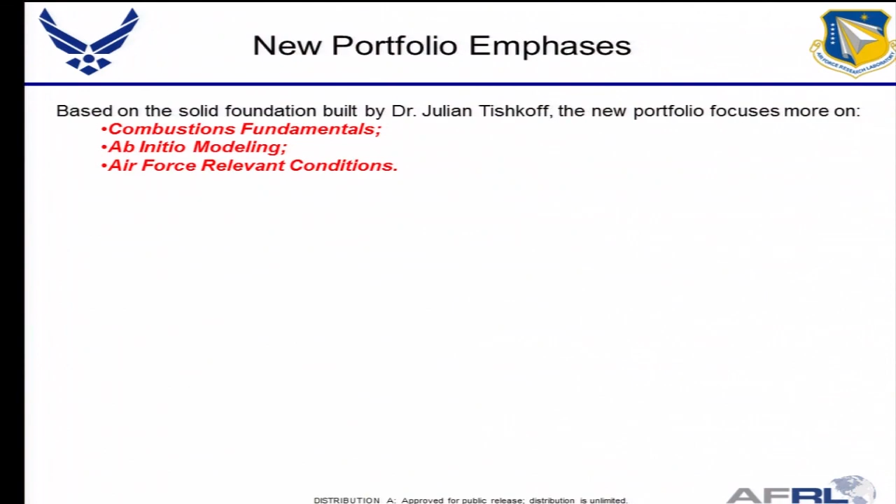But here are more the attributes of the portfolio: we go far more fundamental into turbulence flame structures, turbulence flame speed, and other properties. In the modeling area, we'll go far more first-principle based. If we cannot do first principle, we'll base our model on experiment data rather than uncorrelated assumptions.

We will focus on Air Force relevant conditions, and that does not mean I try to focus each propulsion engine type to make it apply. That's happen to be where the most interesting phenomena happen, where we will understand things.

And the sub-area, as I talked about, diagnostics and experiments: we try to focus on the region at high compressible, high Reynolds number conditions, which happen to be relevant to Air Force systems, which happen to be understudied before. I will have a chart to show you on that.

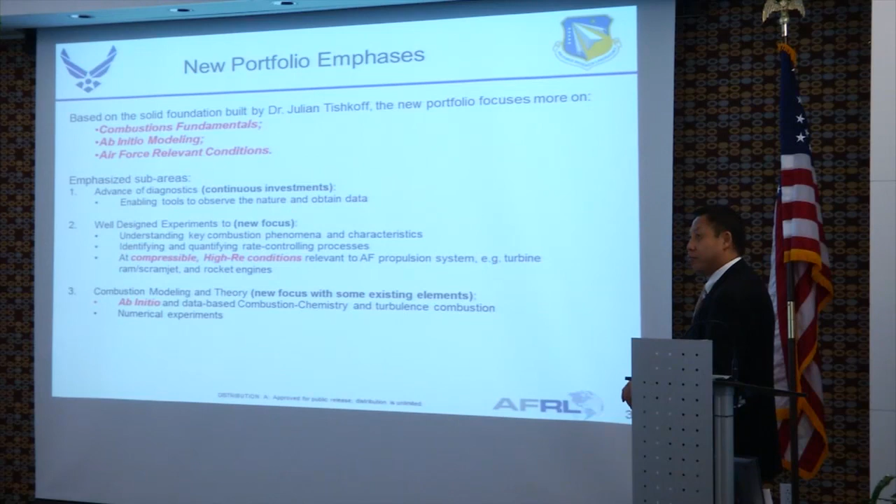And in modeling and theory, we'll focus on the first-principle-based model and the experiment-data-based turbulence model. We'll focus on numerical experiments. We'll use numerical experiments as a tool to allow us to explore nature and explore phenomena. So that's why we try to use it.

And the portfolio already has an element using it. We'll probably expand that - we found it's a successful way to supplement the physical experiment. And lastly, we'll explore different types of combustion regimes in areas we haven't explored before. And in the case where we have too many rate controlling processes, we can really make sense of handling it - we can inject and impose a rate controlling process to make the phenomenon behave the way we like. So those are the lines of exploration we're going to take.

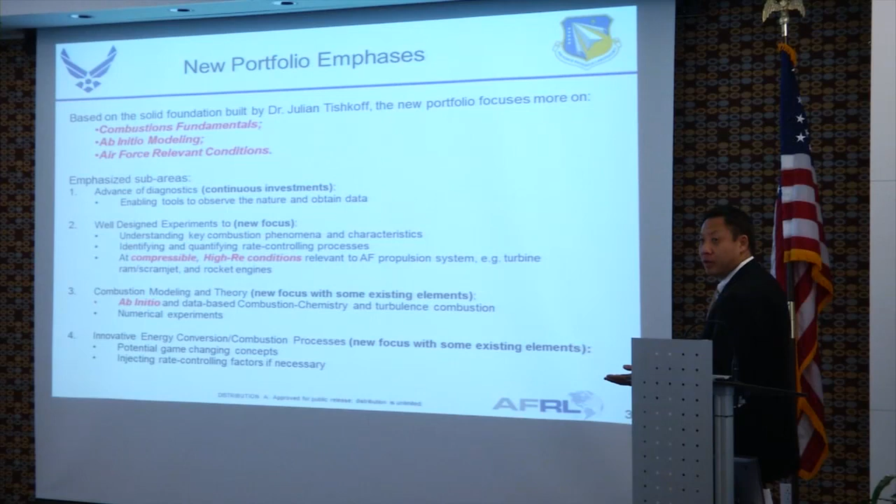Let's go into the next page. What is the key combustion phenomenon? I'm relatively fortunate because in this area there is a key phenomenon that has been recognized for hundreds of years, which is called turbulence combustion or turbulence flame. But in the area we're interested at, it's really underexplored.

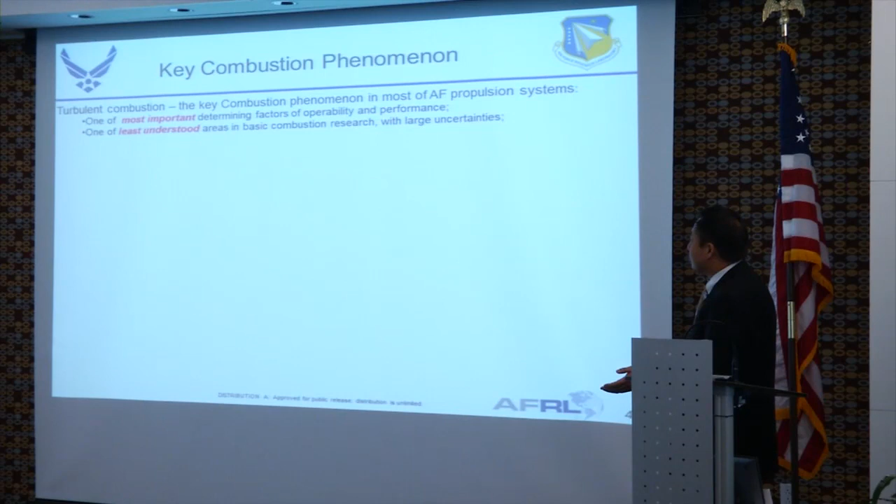So that's the focus: turbulence combustion, which is a key combustion phenomenon in most Air Force propulsion systems. It is the most important determining factor for operability and performance. It is the least understood area in basic combustion research, with rather large uncertainties which prevent us from predicting it properly.

This next topic is a confluence of a grand old fundamental scientific problem that also has immediate and long-term impact. The basic data we're getting will allow us to understand flame structure and flame properties, and some of it can be directly used for the design of next generation engines.

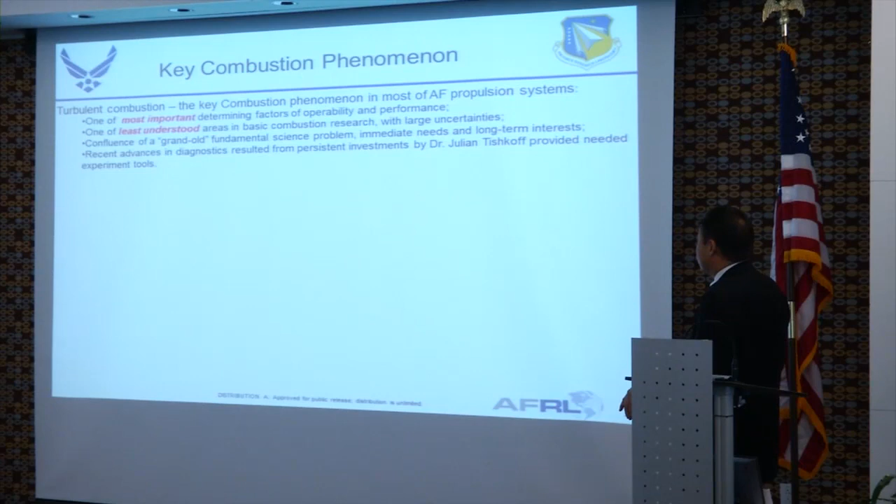It's a perfect confluence. The next factor is the recent advance in diagnostics, from persistent investment by Dr. Tishkoff, which provided the needed experimental tools. That's further substantiation.

That's some typical engines - I think that's the only chart I took from my predecessor's charts. All three of these engines have some kind of combustor, and they all have some flame. Those flame structures, and the way they propagate, determine how well the engine performs, how big the combustor is, how heavy it is - all those things.

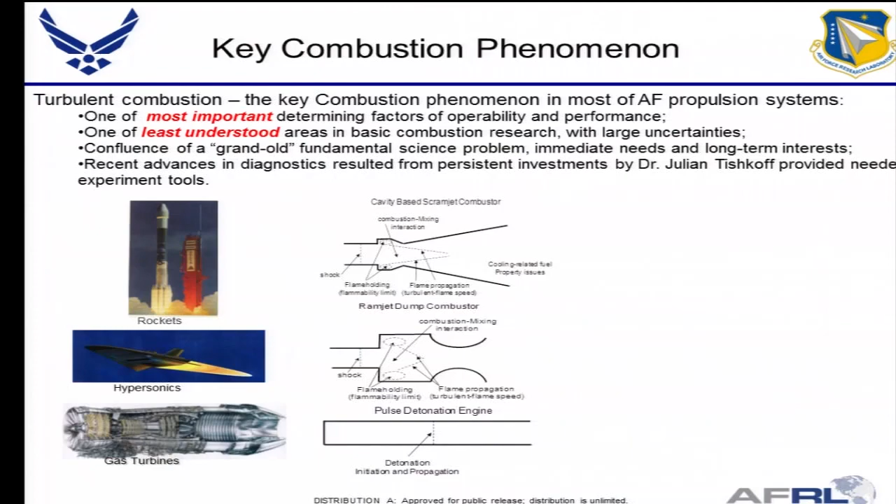Do we understand them? That's the problem - you will see, and draw your own conclusions. Typically people understood the first one, called the Laminar Flame. It's a nice looking propagating flame, well studied with many publications, and people use it to understand things.

But in our engines, we have a flame like this, because that flame propagates too slow, and has a really curved shape. We don't know what the shape is, and very few experiments have been done.

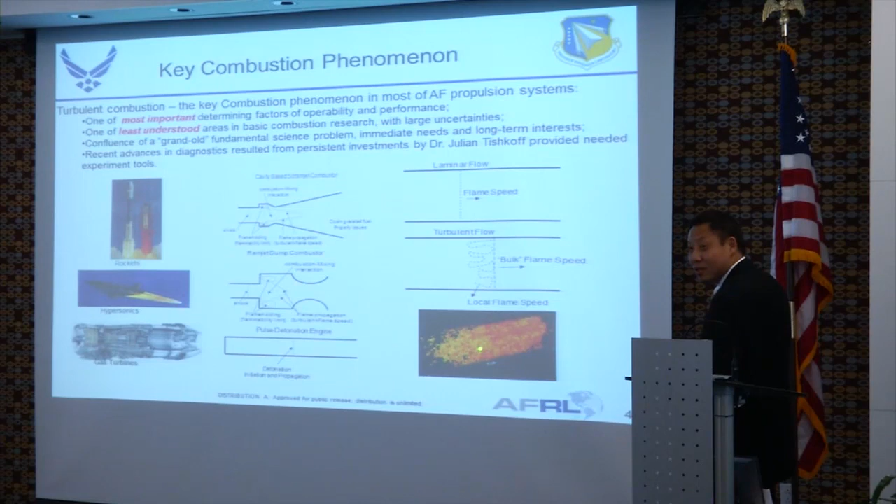In those high Reynolds number conditions, if we push the Reynolds number even higher, what do we see? This is the flame we see. So that's the critical phenomenon we're going to attack.

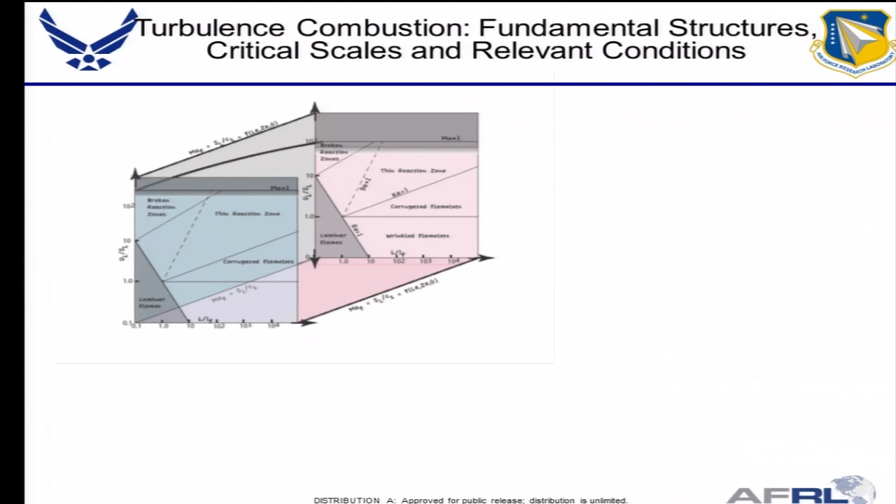You can have Mach number on one axis, and another axis representing the chemical reaction, which we usually call the Damkohler number - it's a ratio of the chemical reaction time versus the residence time of the fluid. We can also have a Reynolds number axis, some kind of equivalent Reynolds number. You can draw it in many ways to basically show the impact of the different critical scales.

This is the pretty diffusion flame region. People have been studying this for many, many years. Some of the PIs still study it in the previous portfolio, trying to evaluate different chemistry processes for different fuels. Where do they sit? Right here.

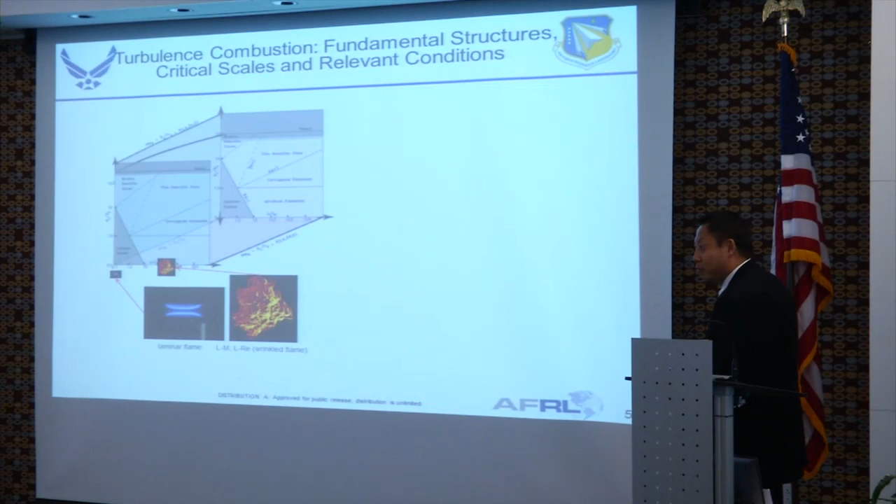This is a little flame ball generated from a bomb, which is typically equivalent to the conditions of an auto engine - the mixture burns in the piston, even a bit slower than that. Where do they sit? Right here.

Next one gets prettier - this one you've seen. This is the flame at high Reynolds number, high Mach number conditions on its way to detonation. I have a movie later showing this. Where do they sit? Right here.

This is the auto engine. This is our engines - where do our engines sit? Somewhere right here. Do we know? We don't know, but we know it's somewhere in between. It's very turbulent, and somewhat compressible, depending on the type of engine.

If you have a jet engine, it's Mach 0.1. If you have other engines, it becomes higher and higher Mach number. You have PDEs here. I've been talking to TDs at different engine companies, asking: do you guys know these conditions?

They say, oh, we have U prime bar, which is the standard deviation average. I said, that's not enough - do you know the spectrum? They don't know. And we have some guesses. I said, no, we're doing science - we need something better than guesses.

So we don't know exactly where they are, but we know it's from here to here. That's what the previous work, supported in the previous portfolio, already tells us - since we're here, we need to understand somewhere here, step by step. That's really the contribution of the previous work, telling us where to go.

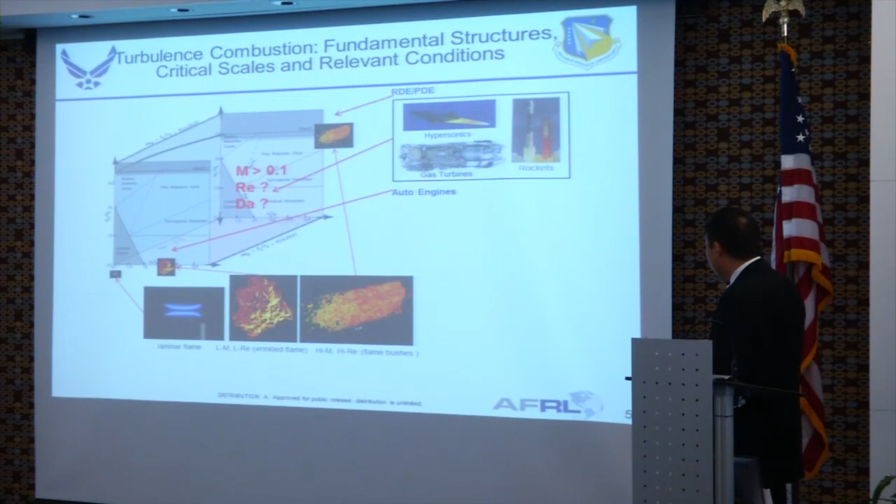There are future things, like detonation-based engines, appearing. So what are the questions, what's the observation? There's little data available in this region. I got lucky - I have some places I can work on, in high Reynolds number, high compressibility conditions.

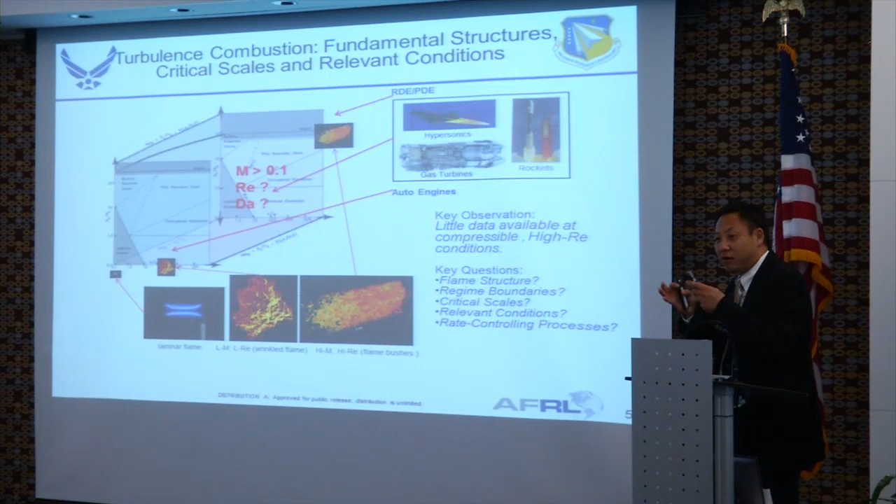Key questions: what do we want to know? The flame properties, flame structures, regime boundaries - where does the flame change its shape, change its characteristics? Critical scales - how important are those scales, and are there any other scales we need to control the flame? What's the rate controlling process - chemistry, heat transfer, all those things? We need to know those things.

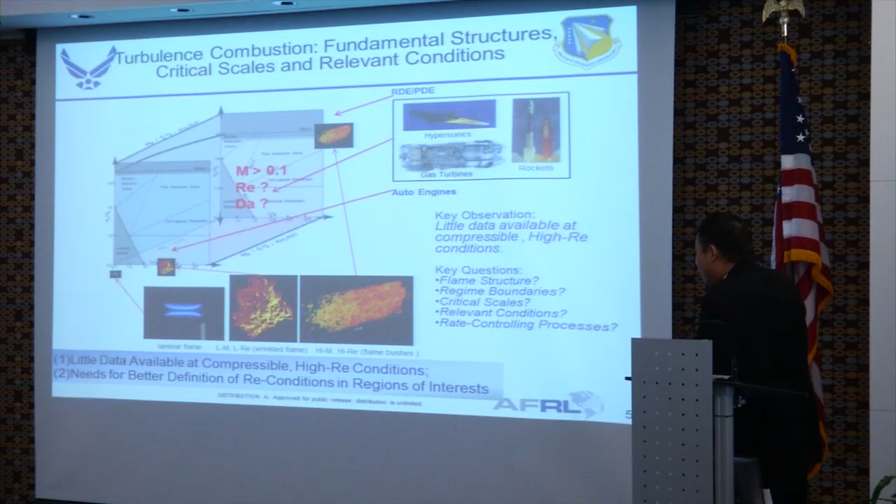So what's the moral, what's the takeaway message? We have very little data now, and we need a better definition of the conditions. We need to go back to understand those things.

And I have my reasoning why that was being done, why so much work was done in that low Reynolds number regime. I wouldn't further speculate on that.

So this is one of the experiments I call the lower bounding case, and it shows how the flame ball was produced. There's further information, a further message to be delivered.

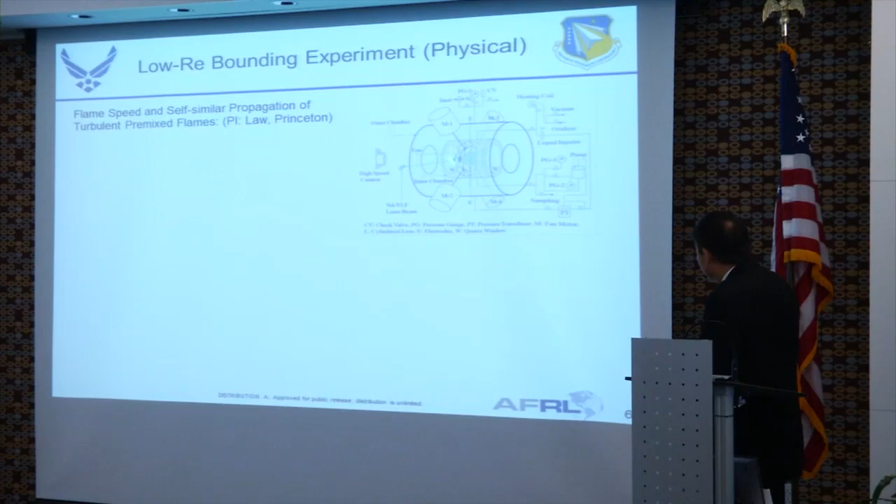What happens is they have an inner chamber. They generate turbulence through those fans, through those motors. Those are the flame ball shapes. Those are the locations of the flame ball, the average location over time. So this flame ball just grows.

The slope of this curve is the turbulent flame speed. You can see at this modest Reynolds number, the speed is already increased. Not only at the beginning, for each Reynolds number, the speed increases through the course. So this is the effect of turbulence.

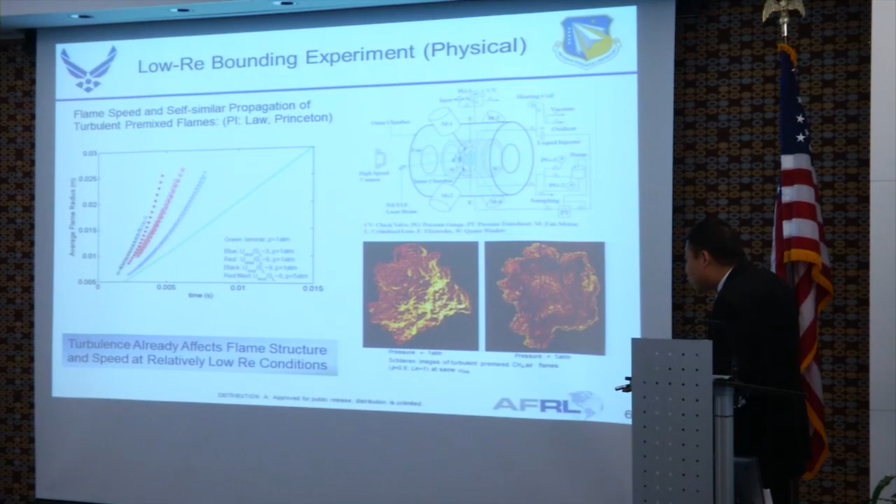And it's already showing a fact which is usually not really well considered, from basic scientific understanding all the way to the design tools. So what does this tell us? Turbulence already affects flame structure and speed at relatively low Reynolds number conditions.

Upper bounding case. This is when I was also existing alongside PIs, and our Navy partners had a great team. And our NRL, supplemented by one of her younger researchers from Ukraine, explored not only this type of detonation flow but all the way to supernova explosions, all those things. They basically applied similar numerical simulation as exploratory tools to do experiments and explore all those things. So really great things came from that team.

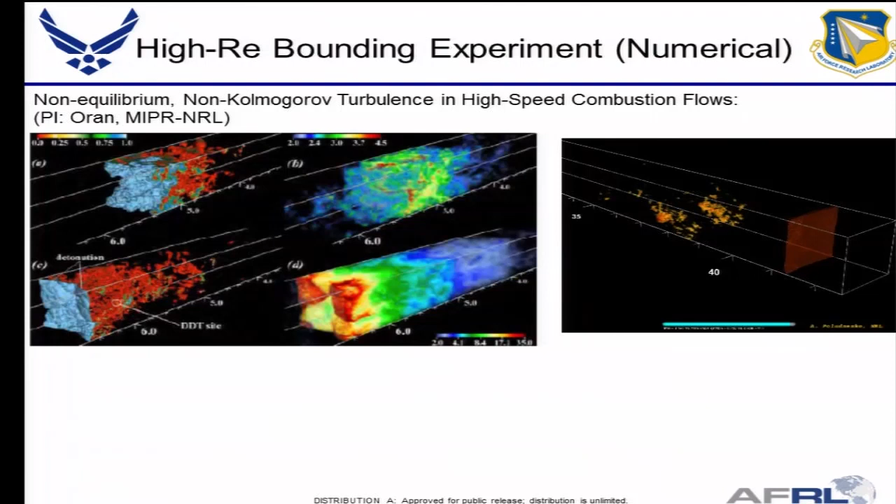Finally, order arises from it. Order arises from it when you see a little surface going to the right, becoming detonation. Then detonation is a very well-defined structure in the combustion.

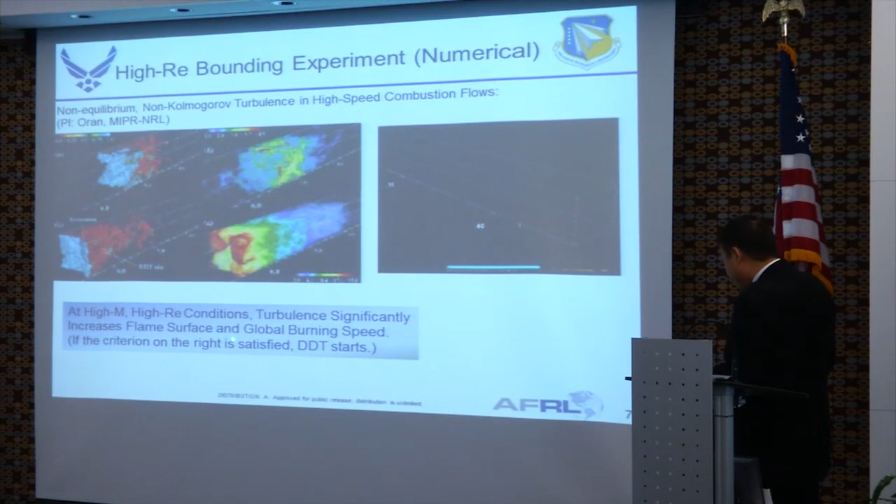And so what happens is, at this very high Reynolds condition, the turbulence significantly increases the flame surface and the global burning speed. If the condition on the right-hand side, which I haven't shown you yet, is satisfied, the DDT starts.

This is another great thing that came from this group. And once people write this down and start explaining it, it's super simple, almost obvious. Why didn't I figure it out? Because I hacked on this problem for 20 years.

I never saw this. What it says is - this is sound speed, this is the ratio of density before and after the flame, and this is turbulence speed. If turbulence speed is greater than this criteria, it goes to DDT.

What happens is, because you rely on sound waves to relieve the energy produced from those reactions from the flame, if the energy is not able to release - if this goes too fast and pressure accumulates - then you're on the way to detonation.

And so they came up with this. They got, I think, a paper in Nature - you see, I'm in the combustion business, we don't usually publish papers in Nature or those things, we have our own journals. This is our advantage - probably one of my PIs won't get a Nobel Prize, but they started publishing these things and being appreciated.

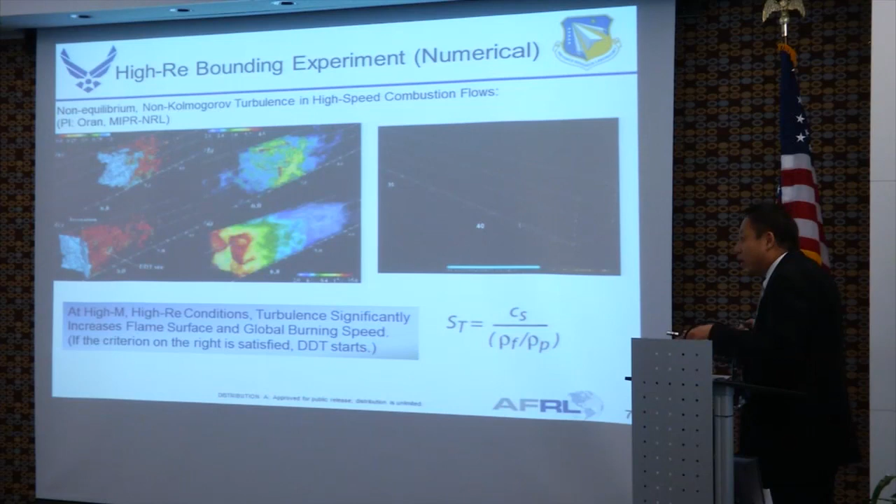So this is one of the really interesting things, really makes me kick myself, because I was doing similar things. And why didn't I think about this? Okay, so let me go into the next chart fairly quickly.

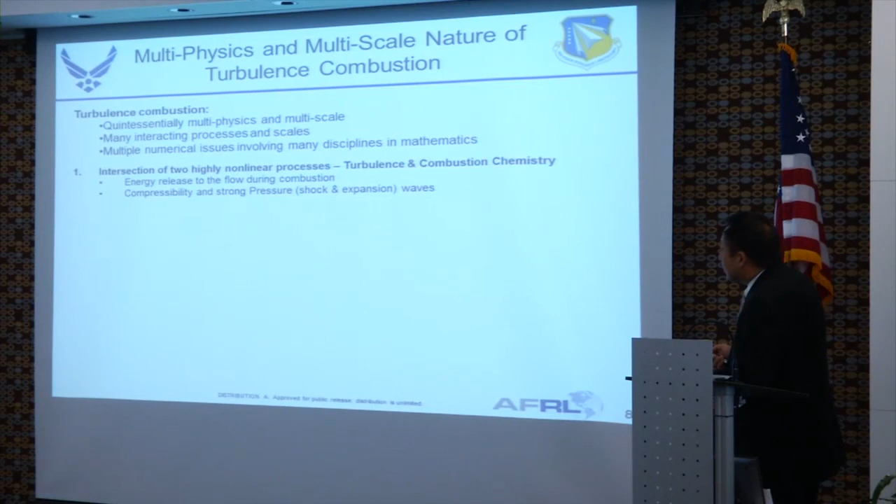I want to get more into the physics. The next two charts basically say we're dealing with multi-physics, multi-scale phenomena. Turbulent combustion is quintessentially multi-physics, multi-scale. And the next thing I want to say is it's the intersection of two highly nonlinear processes.

If you think of John Schmisseur's and Doug Smith's life stuff, he has one nonlinear process. I've got another one - chemical reaction terms, which are exponentially dependent. So that makes my life miserable, I can say.

But I'm an optimist. What I see is you have things that can become orderly, like detonation or something. So in all those chaotic things, something may happen after we study this. We may learn something new.

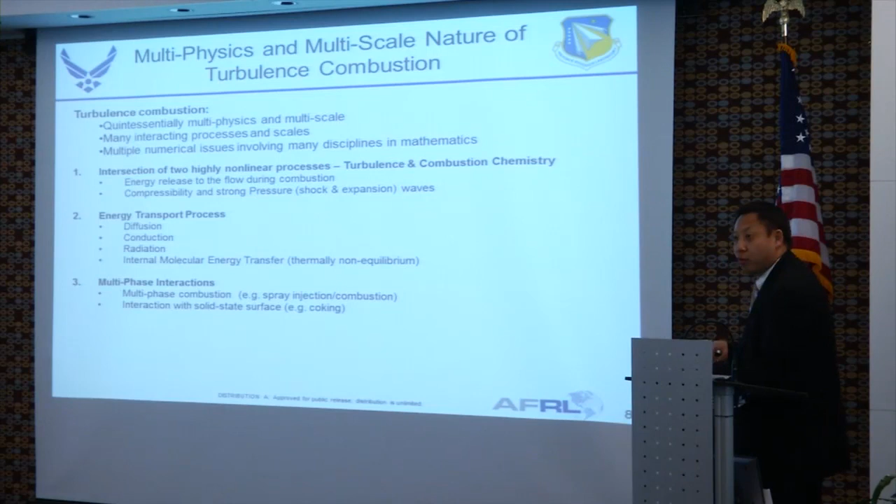And the second one - you have all the energy interactions, diffusion and radiation, all those things. And if we want to consider a real engine, we may have droplets, we may have two-phase combustion, all those things. And we have all the numerical issues we have to deal with.

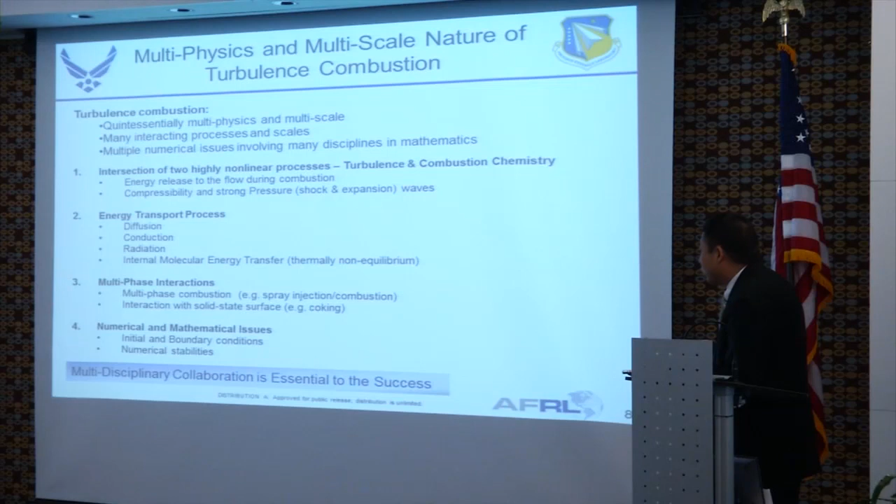So what do we do? We have to do multidisciplinary collaboration - it's essential to success in this area. Next one.

Well, the portfolio has to have some underpinning philosophy. Each program manager has their own way to do it. It's not the only way, but it's one way. As long as it makes sense, we do it.

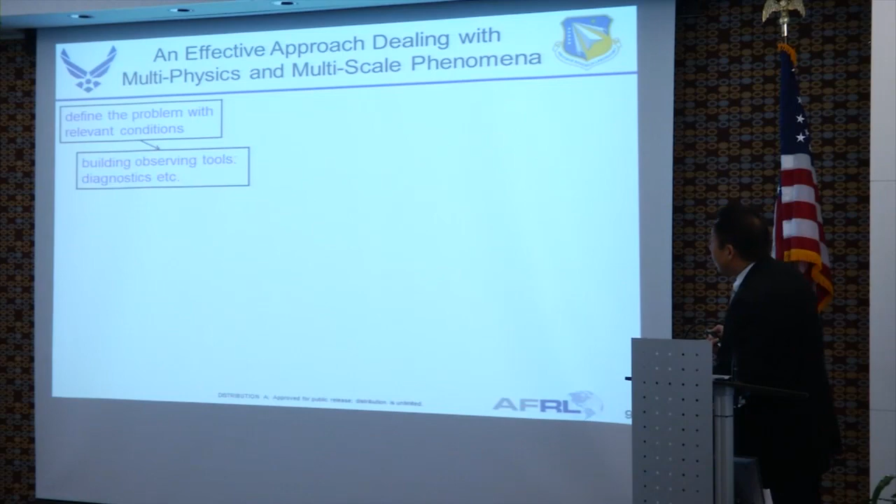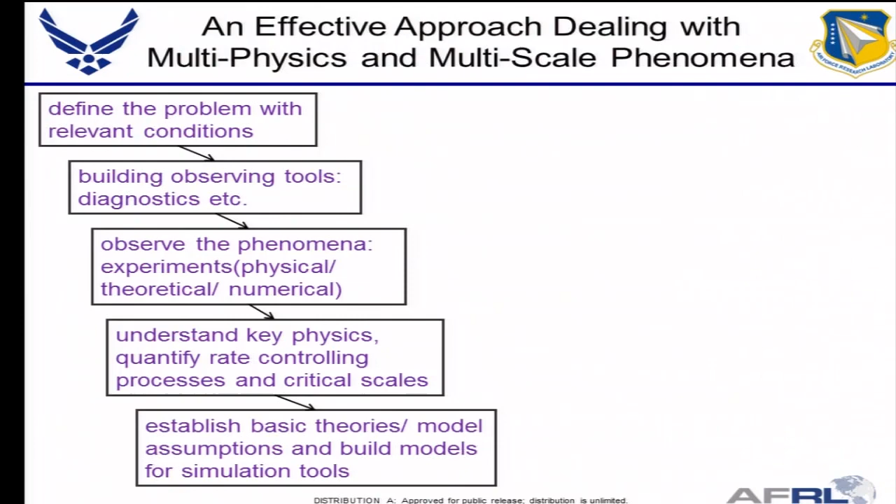What we like to do is try to understand the nature, build our observation tools, get our understanding from experiment or numerical experiment. Then we understand the key physics. We try to quantify the rate controlling process. If we can, we establish a theory which we can use to predict the future.

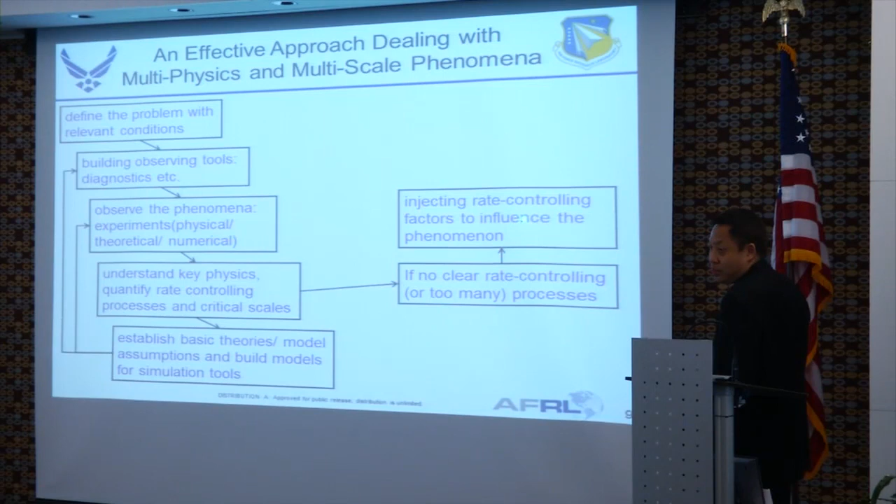And so it goes back. If we cannot, then we are not totally out of luck. We may impose other processes like plasma or catalytic to create a rate controlling process. Then we can manipulate the phenomenon the way we like. And if we understand that, we can do the step.

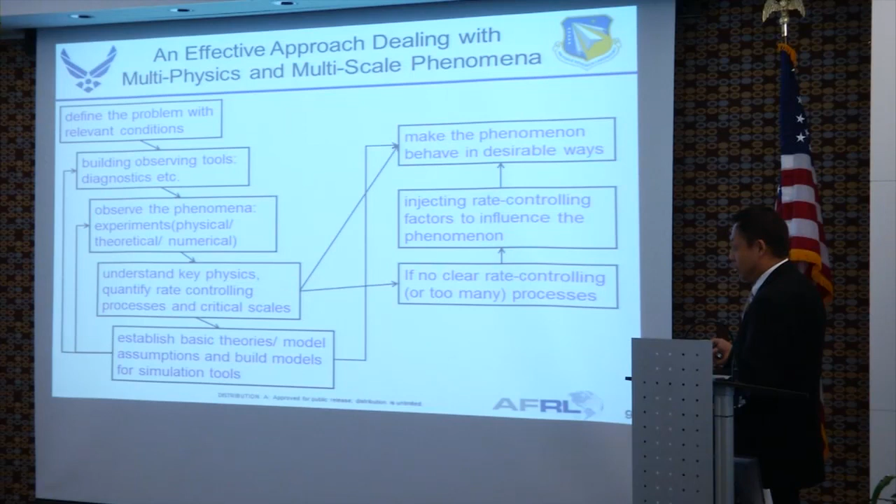So that's the philosophy we're following at this stage, for the next year, maybe 3 or 4 years, depending on what we learn. There's also collaboration with other agencies. To save time, I will stress only 3 points.

One, we already have a pretty strong collaboration. Number 2 is we divide the problem, divide and conquer. For example, in this portfolio, we will now focus on the highly compressible, high Reynolds number conditions, more relevant to Air Force engines.

I will leave laminar flames and low Reynolds number flames more to the auto engines and ground systems, to DOE and NSF. NSF supports everything, and DOE handles that. We've already had talks with key DOE personnel, my counterpart, and people at Sandia.

Sandia has a whole bunch of really excellent experts, and their work is great. So if they can focus on the lower Reynolds number regime and push up, that will help us and help them. We'll work on this area.

Not much work has been done before in this area. We've talked and met at different meetings, but I'm going there in a couple of weeks to further solidify this relationship.

So we divide the problem - different agencies do different things. As John mentioned, there's an unfortunate situation with NASA's effort on hypersonics. I will not drill further on that.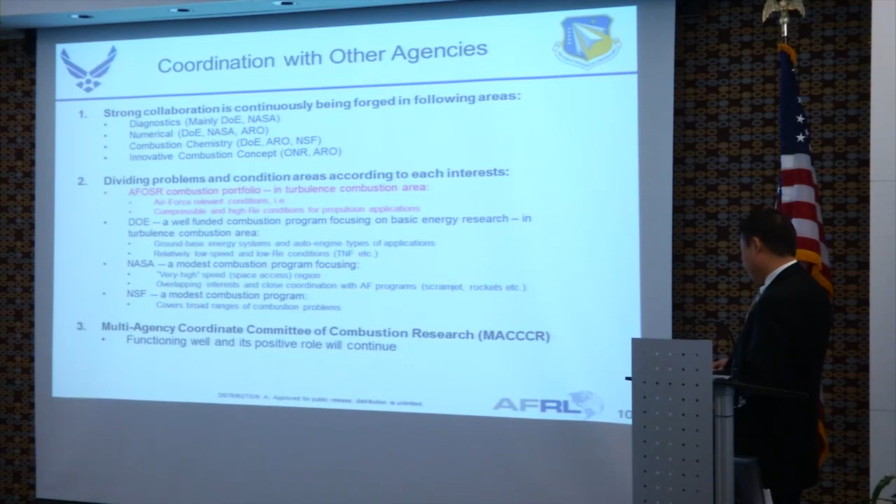The last point is the macro level. We have a multi-agency group called the Coordinated Committee of Combustion Research, created largely by my predecessor, Julian Tishkoff, many years ago. I've now assumed leadership of that. It's working effectively and helping us, and that positive role will continue.

So the bottom line is multi-agency collaboration benefits everyone. That's how we do it.

Now we go to my first area. This is a very strong area under my predecessor's portfolio. I will leave it as it is.

We will use that to understand the key phenomena and quantify the rate controlling process. We have 3 world-leading experts, 2 of them AFRL staff, Cam Carter and Jim Gord. Then we have Ron Hanson, a member of the National Academy, and 2 PECASE awardees in the portfolio. So you cannot get better than that.

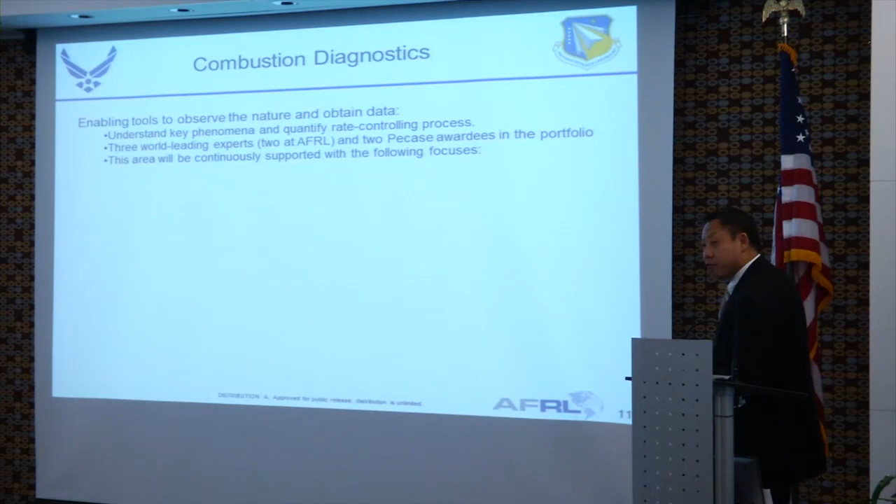This area will continue to be supported, not only to support my current effort, but also to create opportunity for the future, because those investments have to be made earlier. A lot of them start with an Enrique Parra type of portfolio, and then I'm sort of the end user.

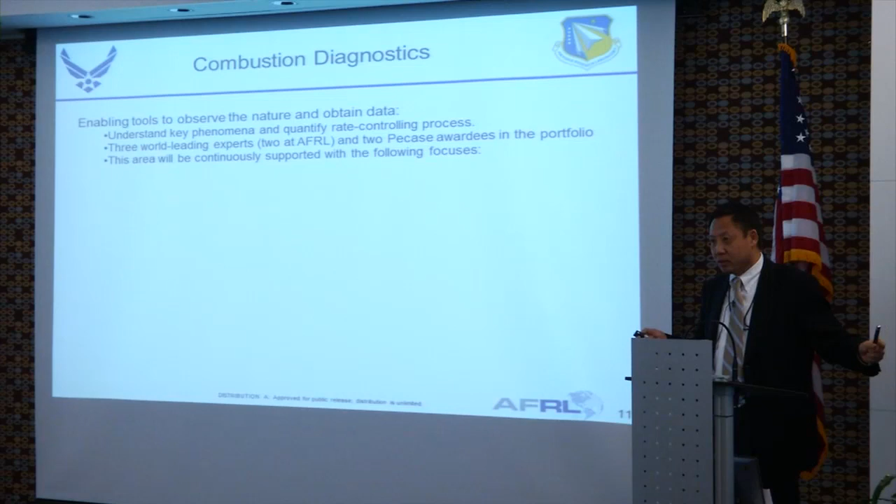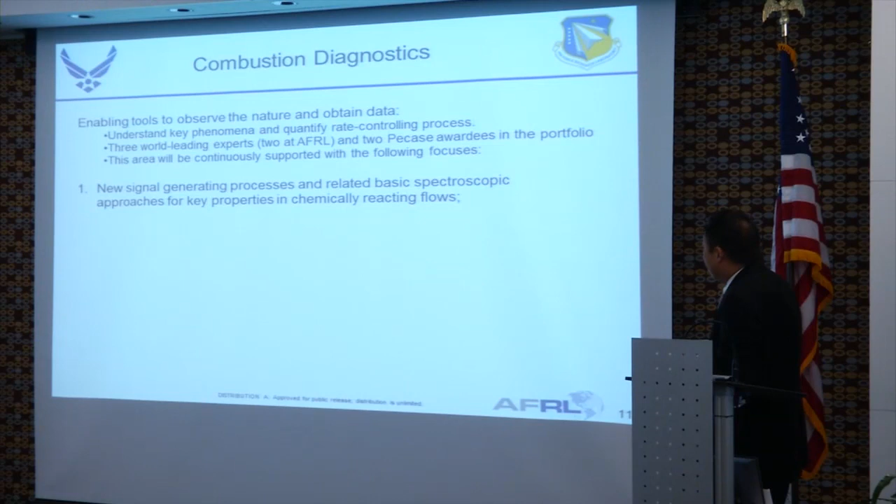They provide the lasers and spectroscopies, and I take over the spectroscopies for end use. So the focus is on signal generation and related spectroscopy. The other one is I will push a little more toward 3-dimensional and volumetric scanning imaging - that's really crucial for our turbulence research.

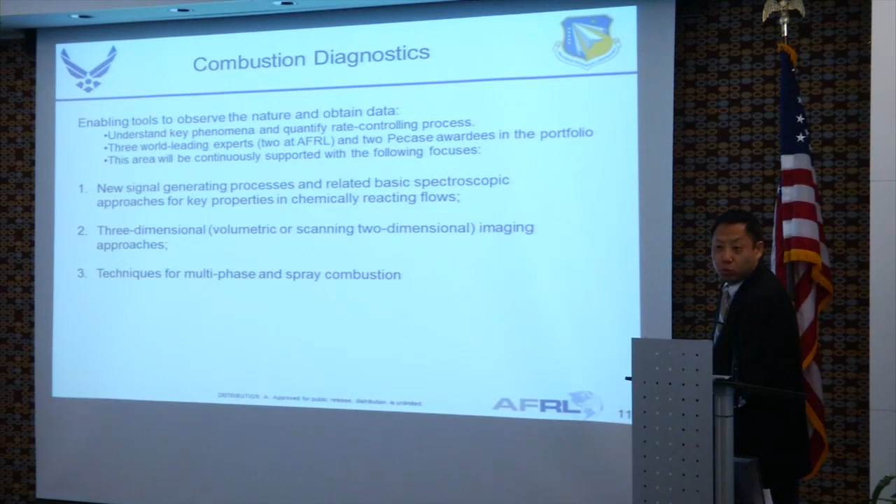And then the other thing is, after we get that 3-dimensional data, what do we do with it? We need some numerical tools to do it.

Oh, I missed one - we're also starting to look for multi-phase diagnostics to quantify the size of sprays and those things. So, support current needs and prepare for the future. That's what we do with the diagnostics.

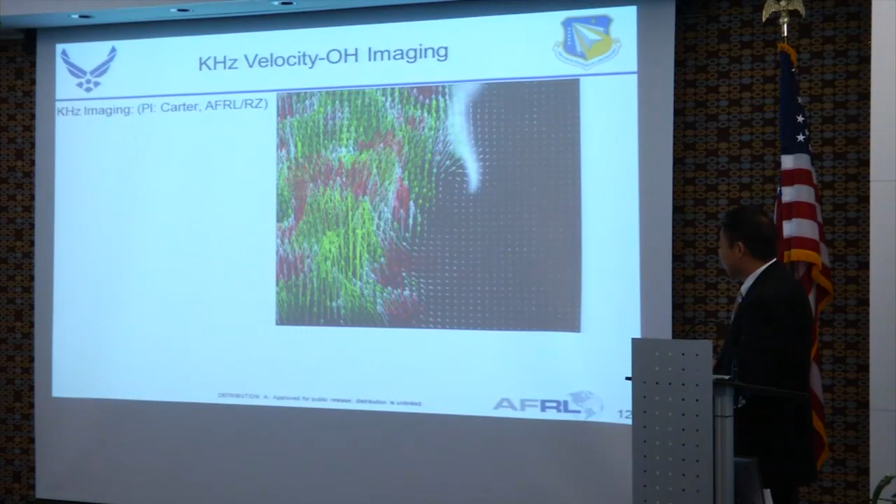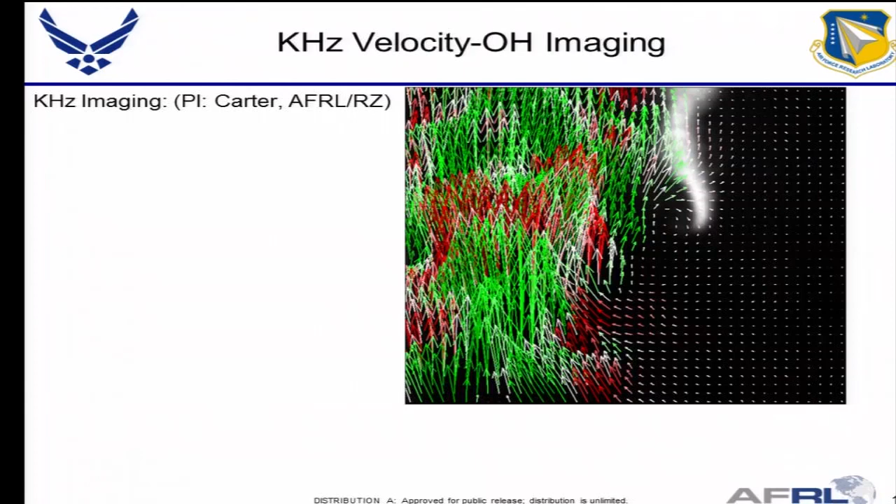I'm going to show you some examples. This is one of the really great works done by the lab - it's a highlight of this lab's tasks. It's kilohertz imaging. The principal investigator is Cam Carter.

This is what he did - actually he did this in Germany, in collaboration with his German partners. This is a little flame, propane diluted with argon. They dilute it to control where ignition starts. This is what they call a lifted flame - you have no flame until you reach here.

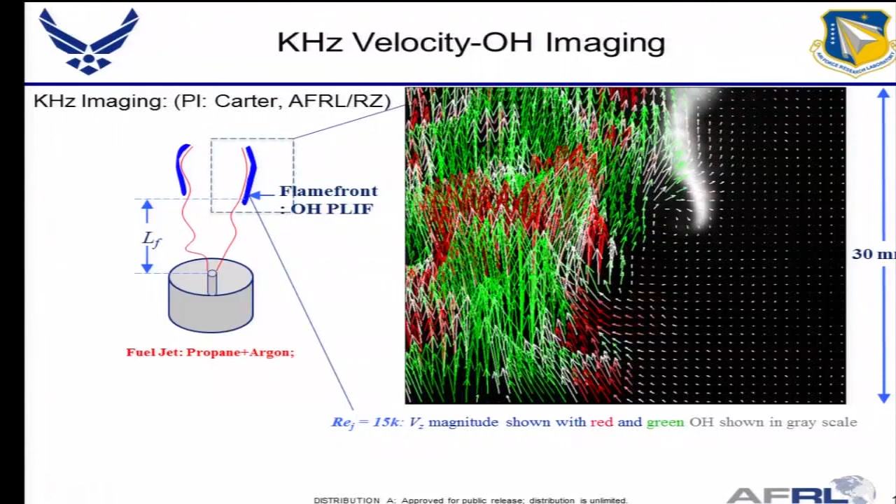And this is the box which the diagnostic thing is being focused at, and this is the size of the box. You see the red and the green are different colors, representing different velocity vectors at different magnitudes. The white is OH PLIF, which happens to be one of the intermediate species in the flame zone.

Then this is the movie it plays. And the reason I like it to play is not for the prettiness, although it's pretty, like a Christmas tree, and it's very refreshing. But what I really want to indicate here is you see the flame goes — sometimes the flame just goes away, then a new flame appears.

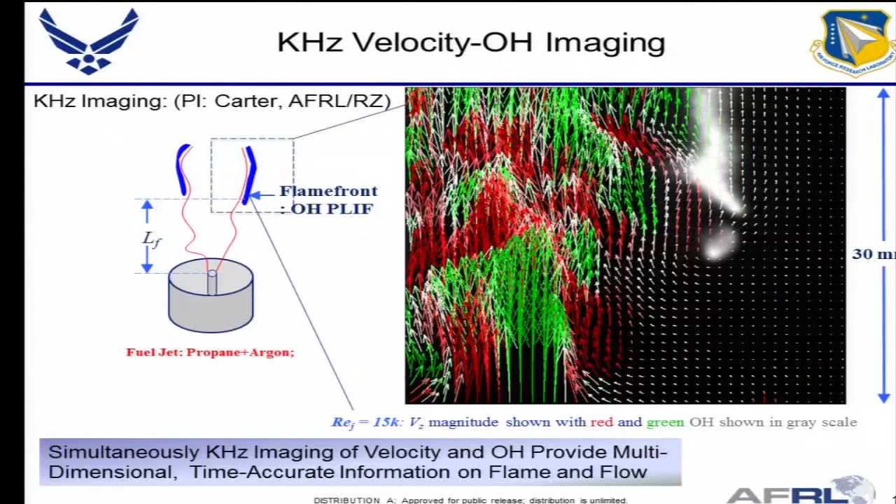You see that new flame appears. Those kinds of events sometimes happen 5 times a second, or maybe 25 times a second. Sometimes it doesn't happen for every 5 seconds. So it's very difficult for people using the current statistical approach to represent the statistical likely location where things happen, or what the timing is like when it happens.

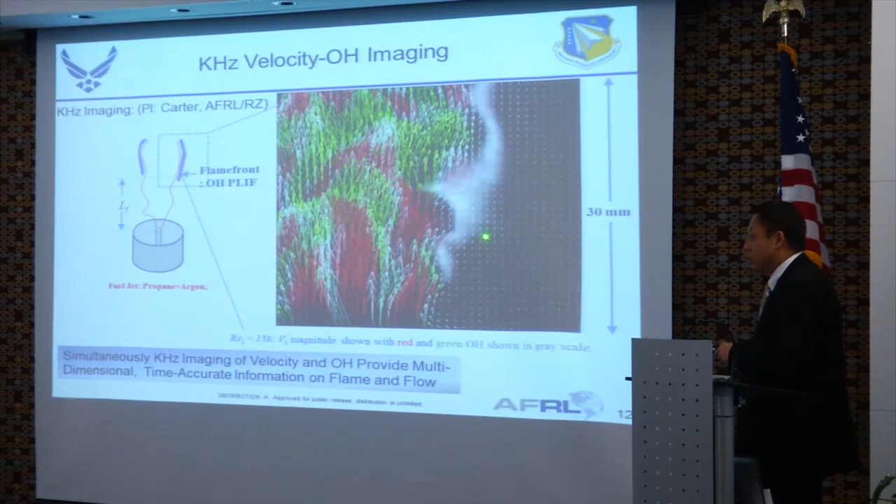In all the RANS simulations, you take bars on the Navier-Stokes equation, take an average, and get a higher moment term. Probably we have to rethink how we model this. That kind of phenomenon is really the driver for the thinking — we have to get this data first to allow us to understand the phenomenon before we really start developing models.

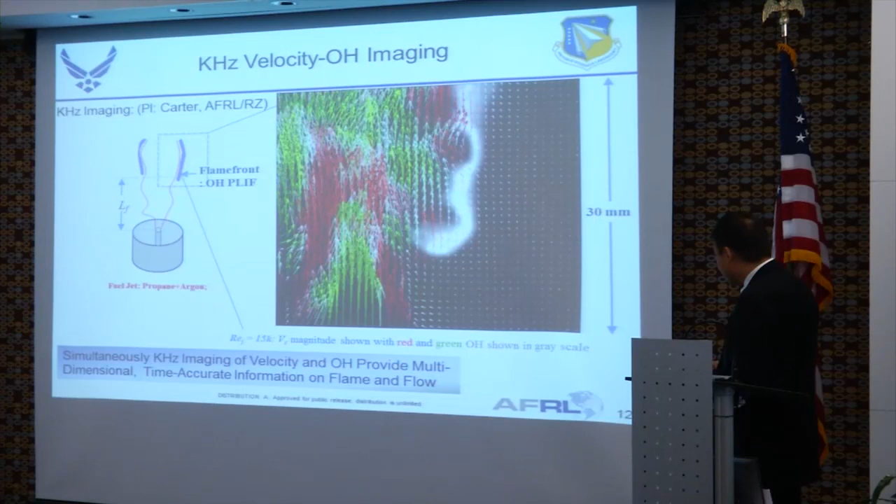Because this is the kind of thing where, if statistically you take an average, what's the average location of the flame? Where does it start? It doesn't tell you — you couldn't do it. But anyway, going back to the thing, this kind of diagnostics is what allows us to go to the next step.

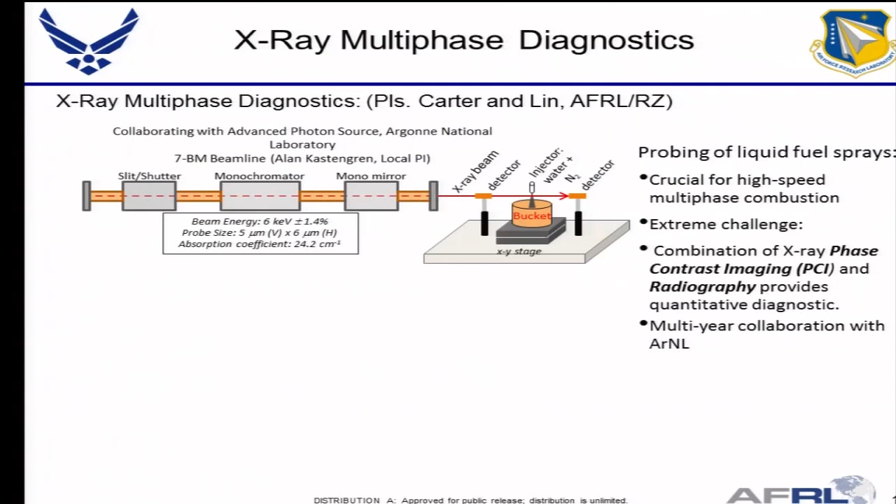Basically, they produce those X-ray sources and shine them through a water jet. The PIs are Campbell Carter and his co-PI K.C. Lin, who happens to be one of the still-living two-phase flow experts, and he's not that old. There was also a well-respected droplet two-phase flow expert, Jerry Faeth, who passed away maybe 8 years ago. We are still waiting for the new rising star in this area.

So we do two things: phase contrast imaging to get you a look at the flow, and radiography, which is basically an absorption measurement, so you see the shape of those droplets.

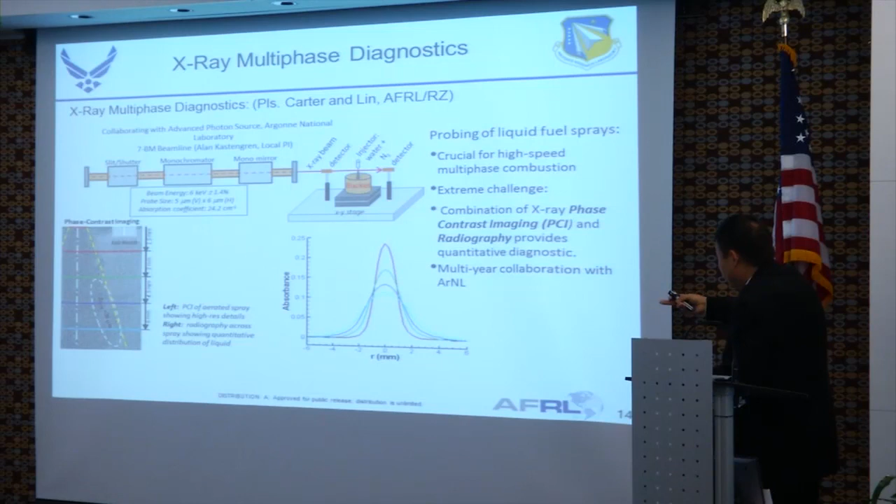Here you see the absorption line as you move along, and you see the different absorption peaks. This line of work will be further extended under the portfolio, under the lab work, and the particle sizing experiment, using the same X-ray source for supercritical injection flows.

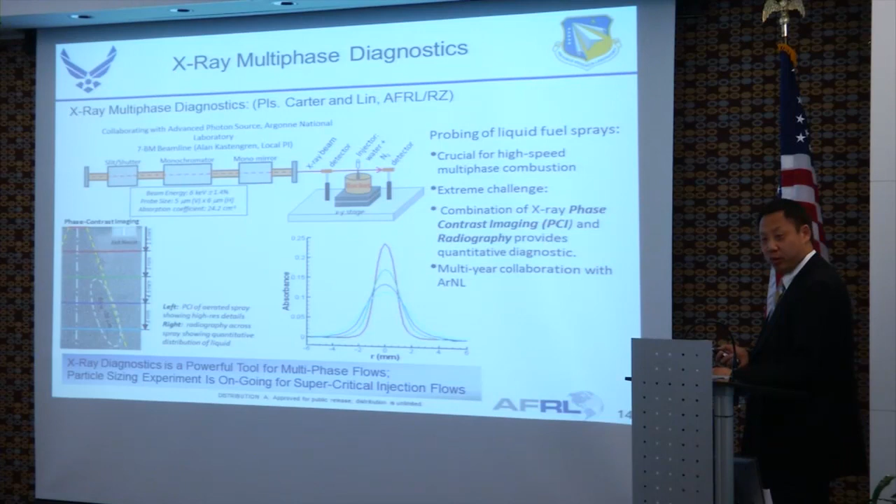So that's so much for the diagnostics — that's what has been done. So what will the portfolio do in the future? That goes to the next sub-area: high Reynolds number, high Mach number turbulence flame.

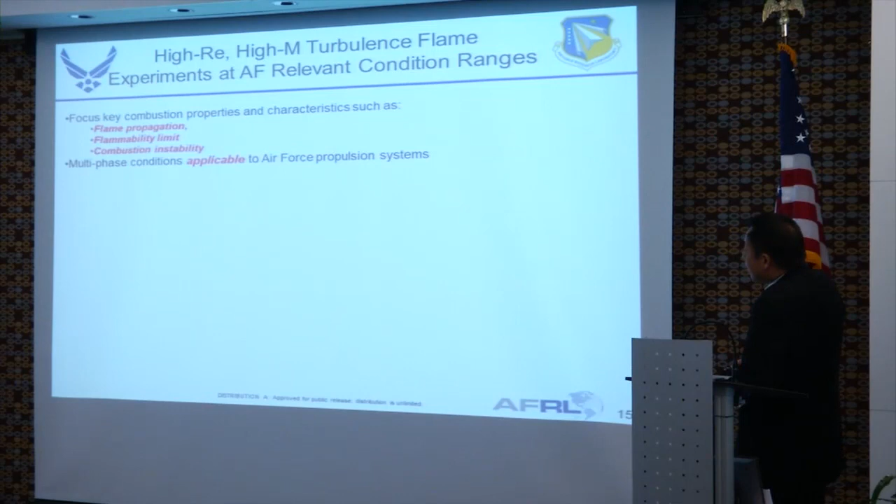Experiments at the relevant condition range. In the last 6 months we've been scrambling, but we've had very good support from the government proposal review team. Those efforts will focus on flame propagation, the flammability limit, and flame combustion instability — in other words, the basic flame properties. And we started with single phase.

Eventually we moved to multi-phase, made possible by the diagnostics. The key requirement of those experiments, as laid out in the BAA, is that we can understand the basics, quantify the rate-controlling process, and also provide the data for developing and validating the basic model assumptions.

I put model assumptions instead of model. Specifically, we need to understand basic physics before we build models. So we need to drill down the model assumptions.

In any of those experiments, it's one essential thing: we have to know the turbulence property. Otherwise, we don't know the flow conditions. So how do we study that?

The proposal has been considered and funded. There's one proposal dealing with the critical scales, relevant conditions, and inherent instabilities.

There are 4 proposals in the experiment, so we are relatively fortunate. We received some very high quality proposals and selected 4 of them. I will pick 2 examples to discuss.

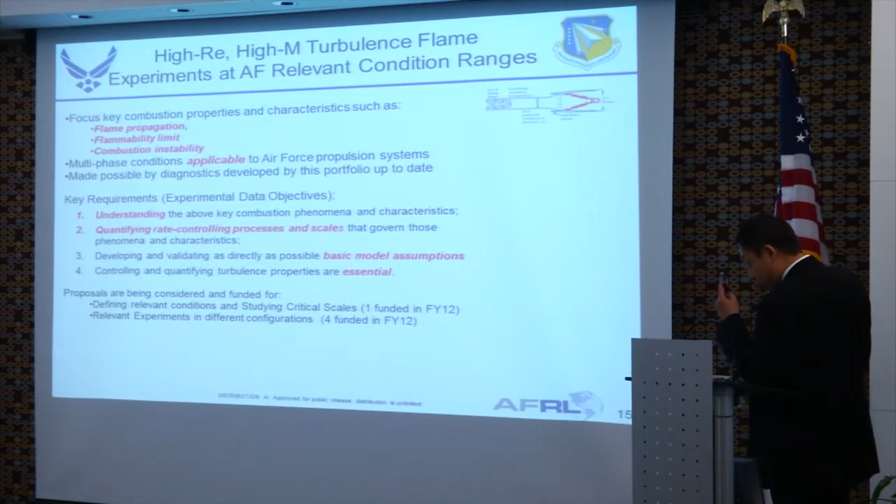So those are the flow configurations. This one is more like engine configurations, and this one is high speed.

The young PI courageously invested all his startup money, a Stanford graduate. I warned him this thing may not pan out, and he may not earn his tenure on this. He said, I'm going to do it. It's a very good proposal, and we're working with the lab.

The other one is from Georgia Tech, which I'll discuss a little bit. That one tries to take the traditional approach to see if it works, and we'll keep supporting this work, pushing higher in Reynolds number.

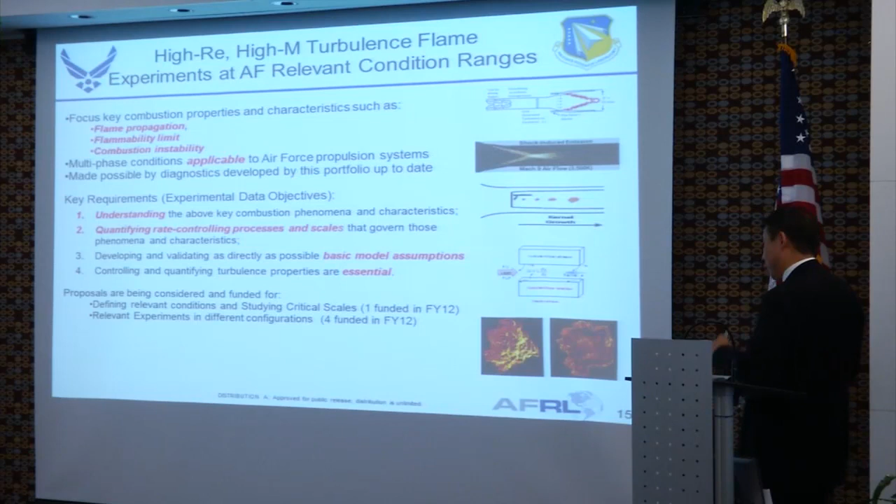So why do I do this? The understanding starts from observational data. We want to know what the flame looks like at those conditions.

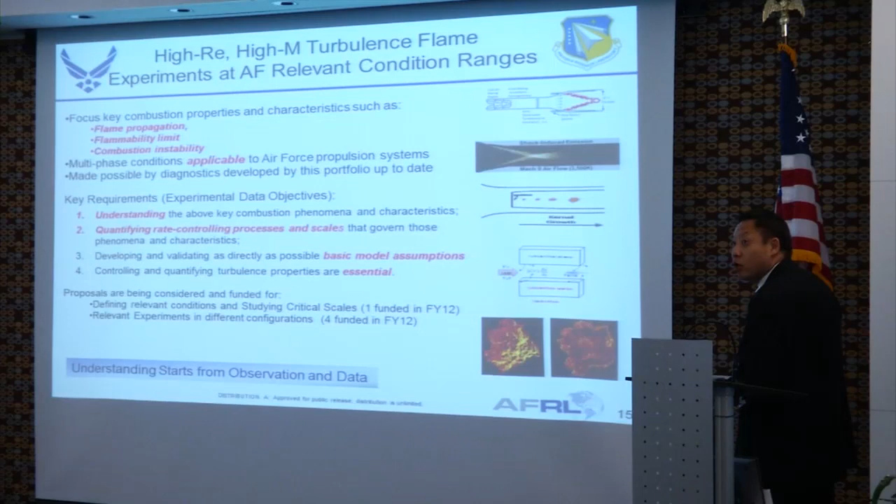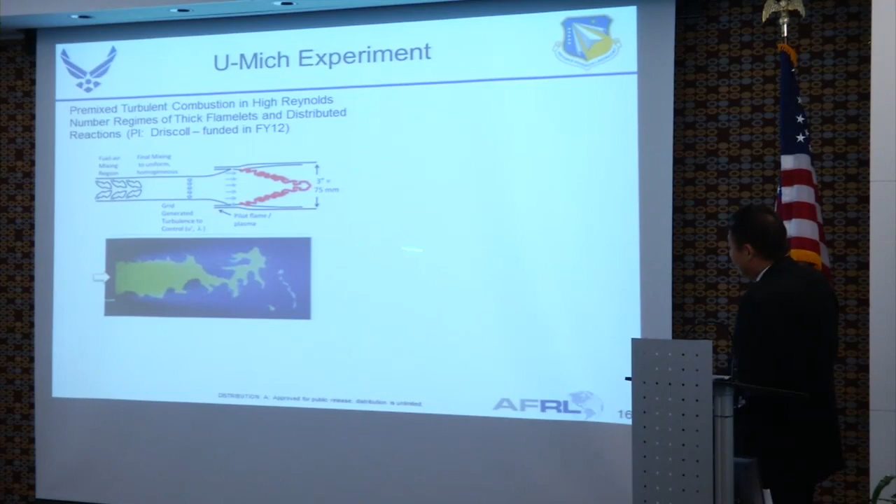The University of Michigan experiment that's been funded actually went out. This basically uses 2 flame sources, and lets the flame propagate in the middle to see the flame shape.

They have done this at relatively low Reynolds number. This is the PLIF imaging, where they see the flame front - that's what a flame front looks like.

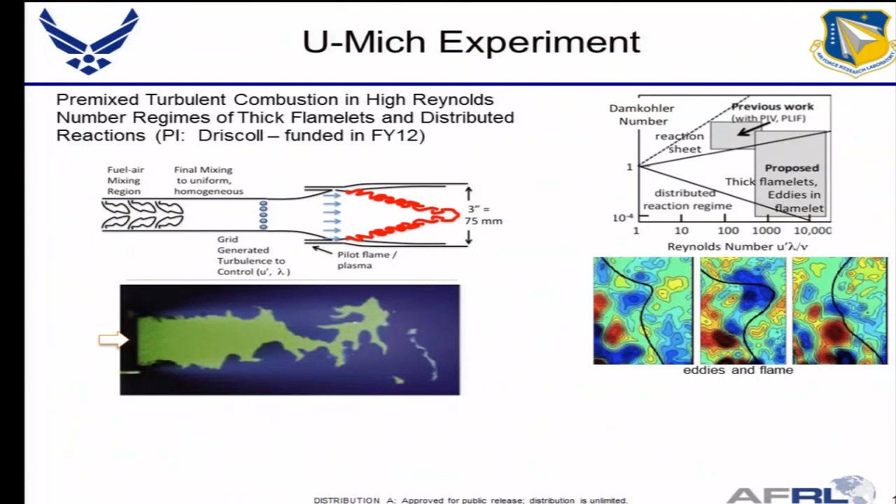So they're going to explore in this regime, which gets close to the jet engine type of things. Then they're going to look at how this kind of interaction works, when an eddy goes through the flame front, and the vortices become suppressed after going through the flame.

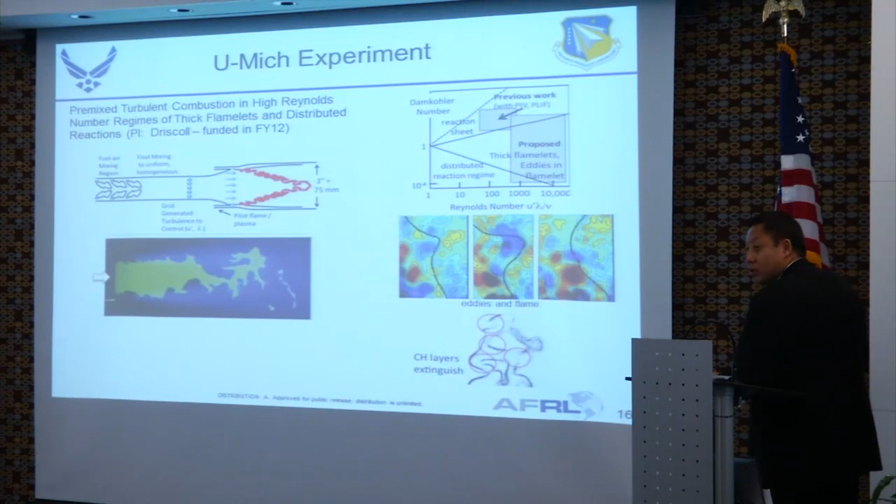They are also going to look at the local extinction. This is the CH PLIF - sometimes the flame is gone here, then it'll reignite. That further tells us the point that we need different rethinking about our current mindset of turbulent flames.

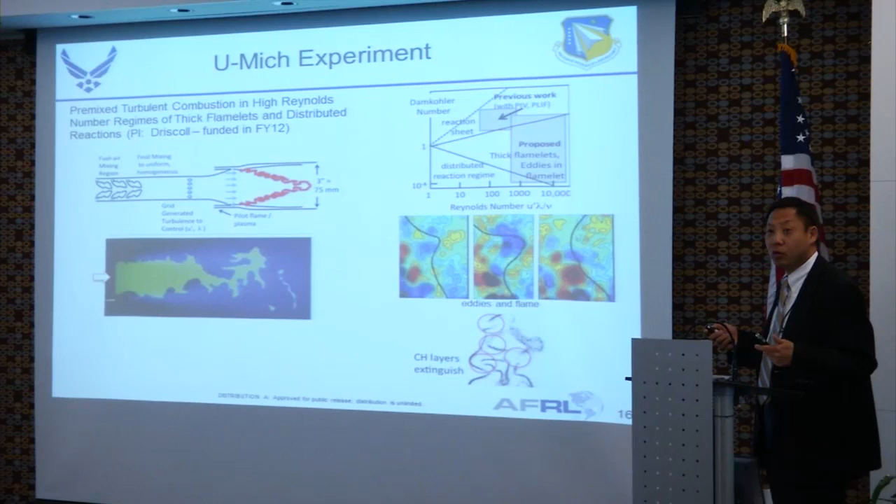Can we get some statistical description of that? Maybe not - we have to do more work.

Since I'm running out of time, I'm going to quickly go through this and discuss two more charts. The second experiment is the one Georgia Tech is undertaking.

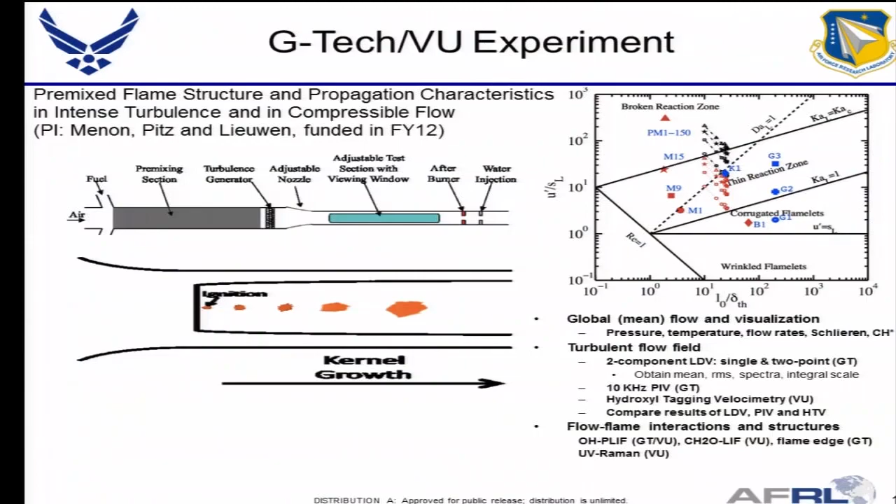They basically have this slug of flow, and they ignite the flame in the middle of the flow, watching the flame ball grow.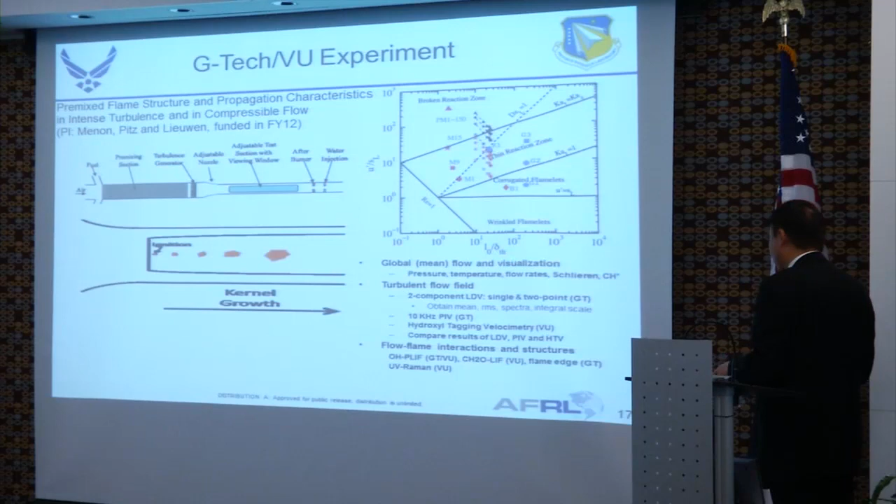They're going to watch in this region and look at those properties. So those kinds of great experiments are ongoing, and we expect to get those results in 2 or 3 years.

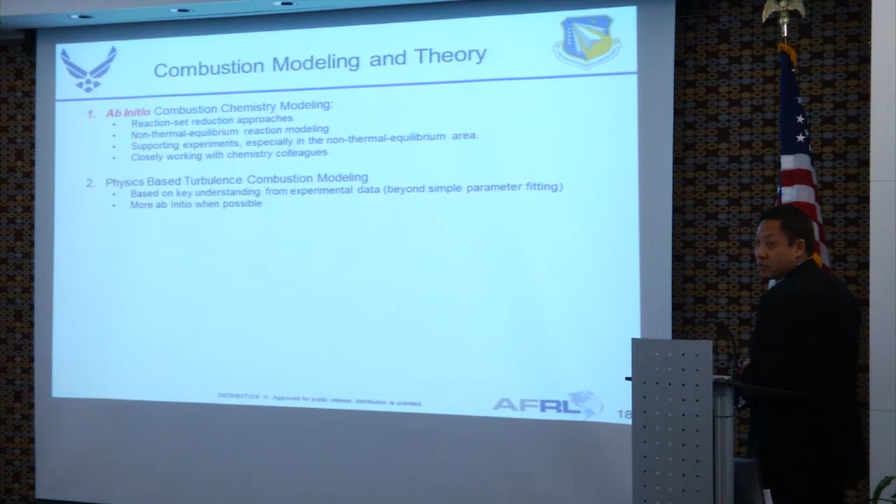So next one is the combustion theory and modeling. There, we're going to focus on more first principle combustion modeling, more physics-based turbulence combustion modeling. If we cannot do first principle, we'll rely on experiment data, and much less on ad hoc assumptions.

The numeric experiment will focus on finding a way to do data fusion. We'll try to apply the DDDAS type of approach and do a combined numerical experiment and experiments.

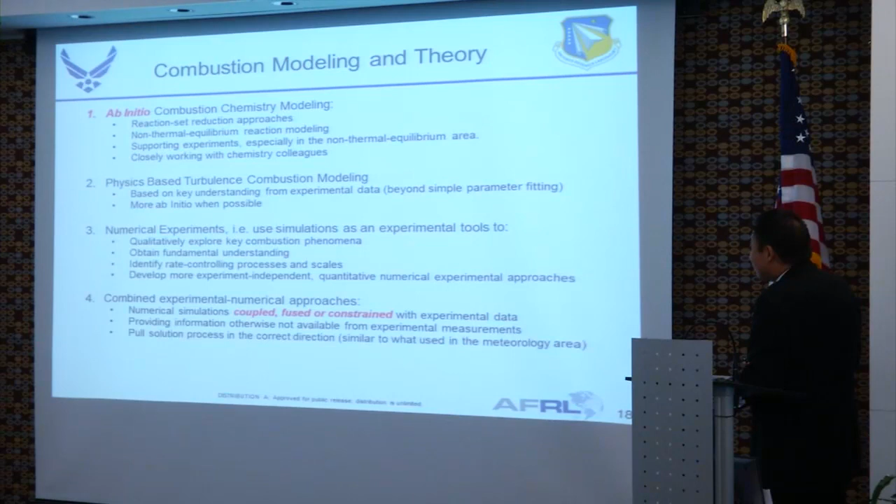I will go to the next page, which highlights some of the ab initio chemistry, combustion chemistry modeling. We have been used to what they call the Arrhenius model. The Arrhenius model is good, served us well, but it has its limit.

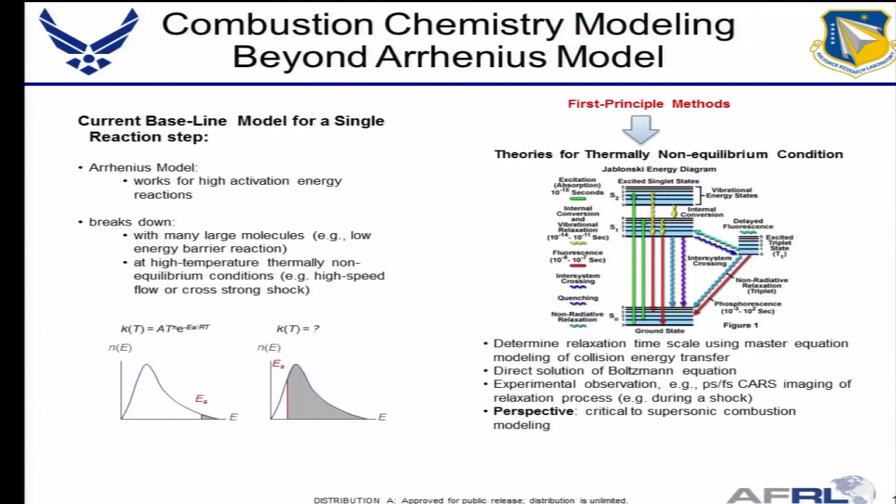Basically, when most of the population is below the so-called activation energy, below the bond breaking energy, the model is good. When most of the things are above that energy, the model breaks down. We don't know the chemical reaction rate.

When we are in thermal non-equilibrium, we even have trouble defining temperature, because at each state you can define a different temperature. So what we do is look at and sum up all the states, starting from first principle, and build new models. That's one of our new focus areas, a new exploratory area considered by this portfolio.

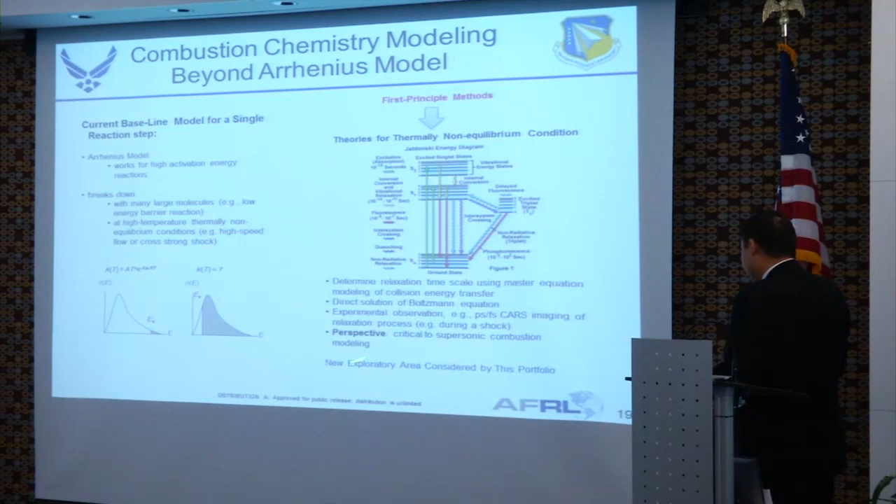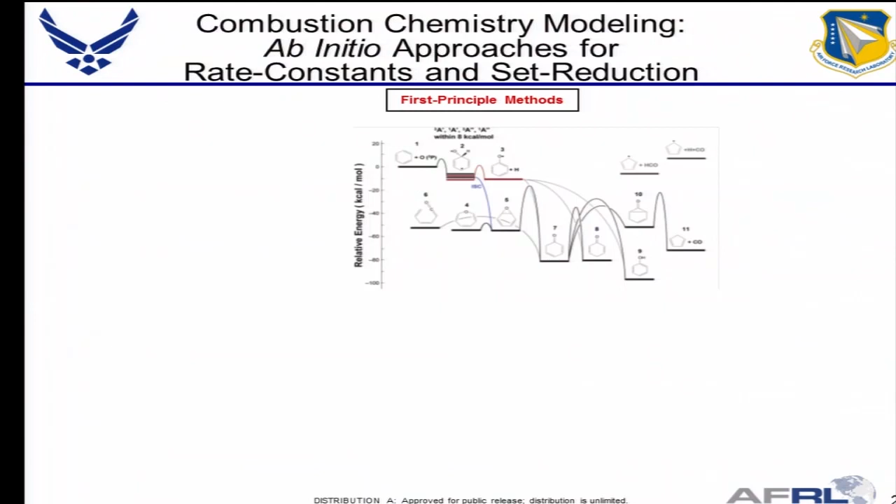Next one - if we have a fairly complex reaction like this, for example benzene, it goes through different stages with a lot of intermediate species. Which way does the reaction go? In your kinetics, how do you pick the most important one? That's the challenge we decided to take on.

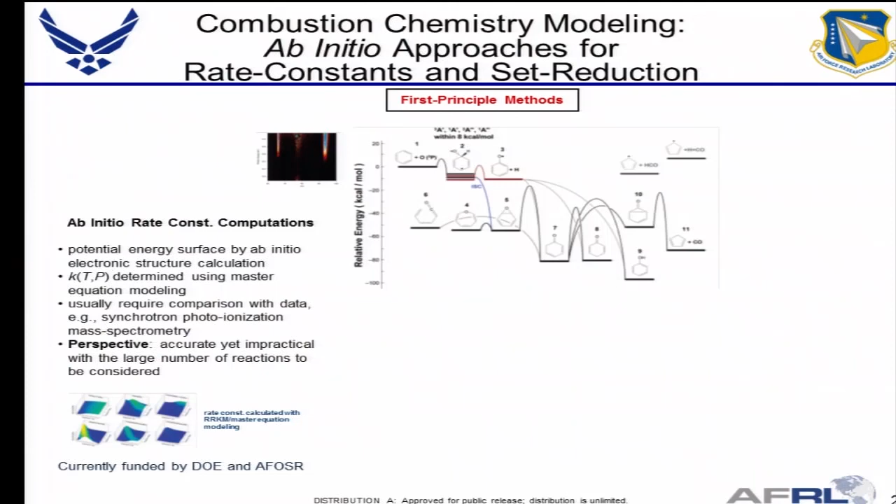There are two aspects of it. You can use this approach, using first principle, like work with Mike or those people, to calculate the reaction rate constant. That has already been done, but supported by DOE and us. Probably I will keep this area flat.

You have heard this 3,000 step reactions. What do we do with it? We cannot do much about it if we start that big. We do sensitivity study to reduce it. There's another way, which may not pan out, but we're willing to explore.

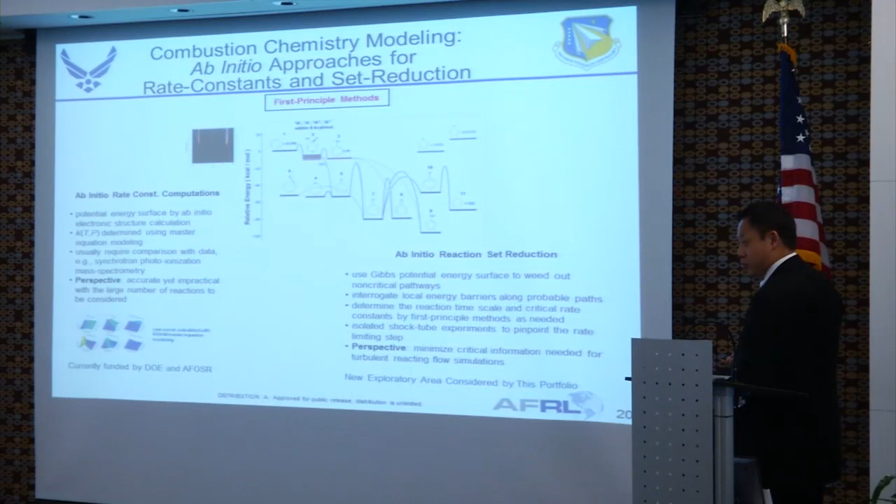We started with first principle. We started with the energy surface. We see what's most likely and approach to craft those reaction steps. So this is a new area to explore. That's where I say the things will be far more ab initio than before.

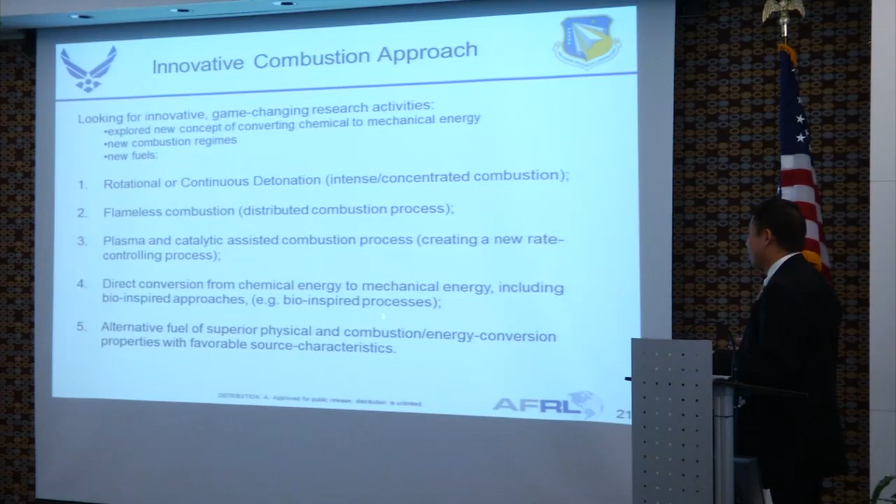I'll skip this last movie since I got only 2 minutes. This is where the fun thing will happen after we understand the basics. Understanding the basics is fun. Once we understand it, we're really happy. That's where we're going to explore detonation, and explore combustion regimes we've never explored before.

The detonation we touched upon—we're going to look at more distributed flame, where the flame peak disappears. That's all kind of advantageous. And the NOx going down, the engine heat load going down, the engine heat signature going down. So we're going to explore that.

And plasma and catalytic assist combustion. Maybe we take some nanoparticles, plasmonics, and these kinds of things to help us with ignition, all those kinds of things. Then we look at some fun things: direct conversion from chemical energy to mechanical energy, and different types of fuels. So those are the third area.

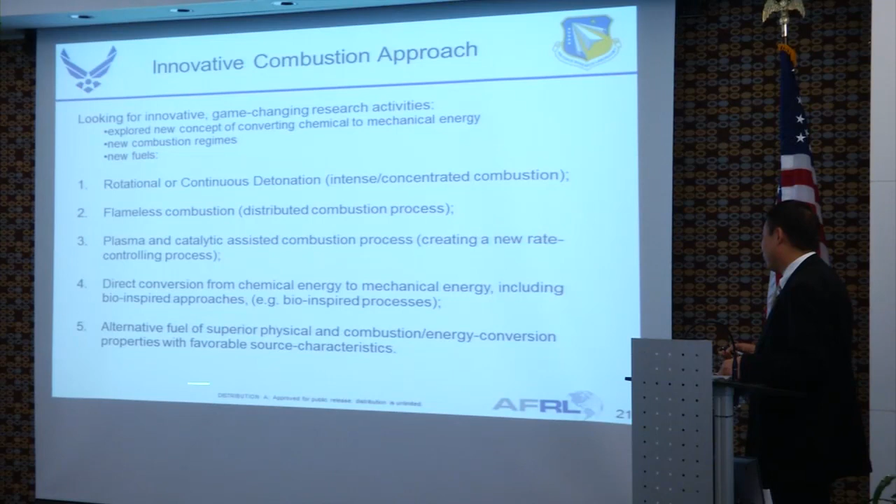There's an example for that. I think I'm going to skip that and go into the summary and looking forward.

The advanced diagnostics will keep investing, and the turbulence combustion experiment effort. We do step by step with gas phase, eventually move to multi-phase. Within 2 years, that data will be online.

I think within 4 or 5 years, we'll have the data for the liquid phase. That will take care of it for a while because we had a great leap in diagnostics in the last 20 years. We'll take advantage of that. In the meantime, we're funding a relatively modest effort on more updated diagnostics.

The next effort is the modeling. We'll focus on more first-principle based models, and actually we're taking a fairly large risk to explore. The last one is innovative energy combustion processes, as I mentioned, exploring new game-changing ideas.

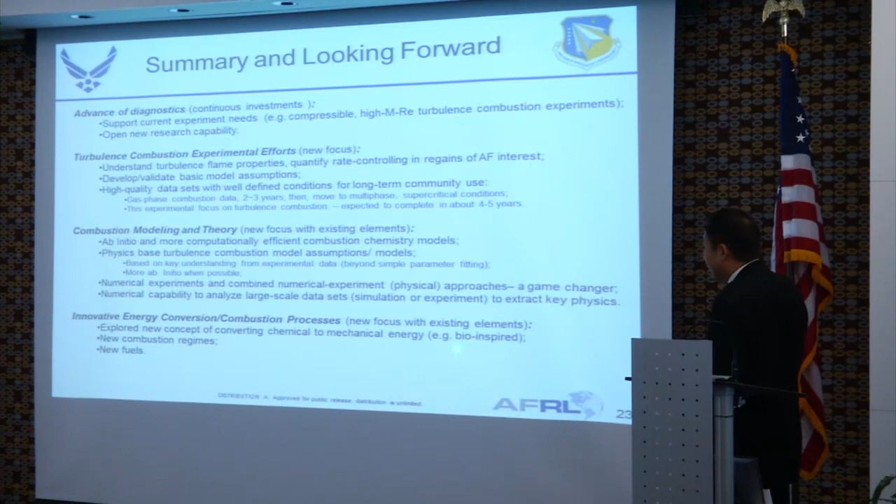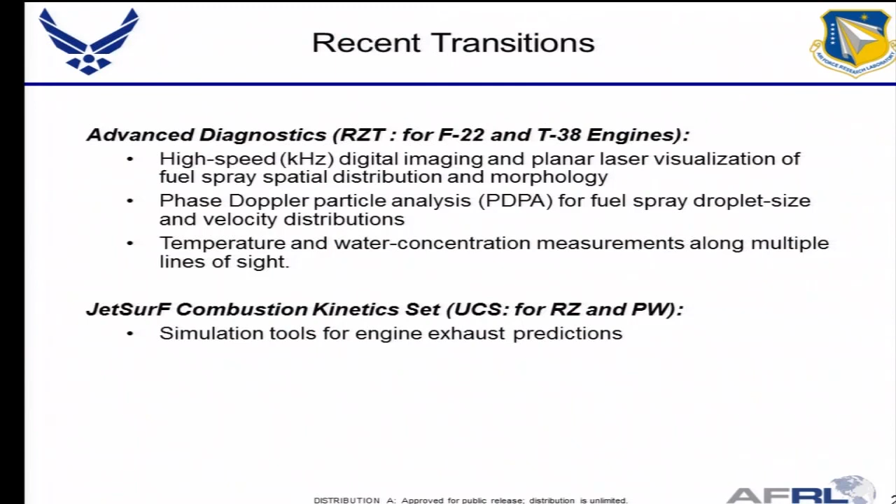There's also some technology transfer from this portfolio. It's really enormous, I'll just list a few quick ones: there's diagnostics, there's JetSurF, which came from USC, and reaction kinetics. Here's my closing statement.